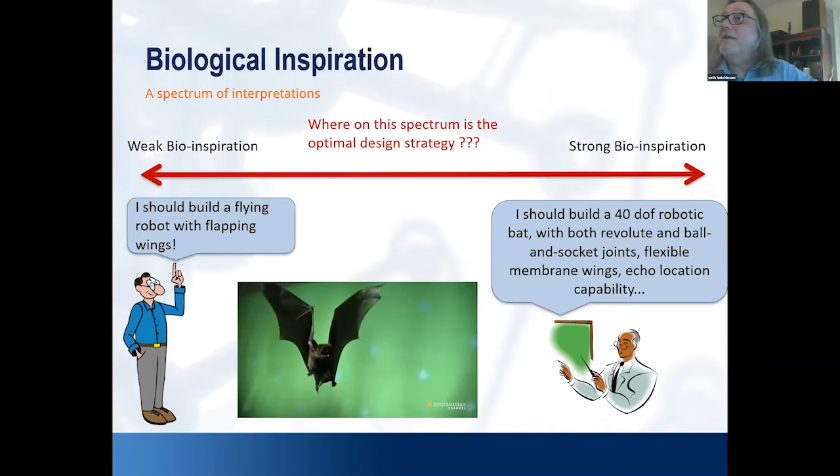So you can place yourself anywhere on this spectrum, from very strong to very weak bioinspiration. And the question that comes up, I think that's interesting, is where should you be on this spectrum? Right? At what point should you move away from looking at the animal and start thinking about engineering? Or should you ever do that, right? Should you focus on the animal and its capabilities and its biological and mechanical structure all the way to the end? So this is how we looked at the problem for this biologically inspired robot bat.

It was first to step back and ask, what are the right questions, right? What should we even be asking about when we look at the biological creature? And here are the first couple of questions, right? Should we try and really build a robot that is a replica of the biological animal? Or should we abstract away a lot of the details of the bat very quickly to a simpler kind of mechanical structure? And this raises immediately the question, well, then what are the salient features of bat-like flight, right? If you want to capture this kind of behavior, what are the right features to look at?

A question that I thought would be really important, and it is important, but not nearly as important as I expected it to be, is what's the role of geometry versus dynamics? And the question that I thought would be really interesting is, can you do flapping flight based purely on the geometrical structure of the robot and the wings and the trajectory? Can we ignore dynamics? If I study bats as they fly, and if I really understand the geometry of what's happening in the bat wings and the bat body and the trajectory of the body, is that enough? Or do I need to worry about the Lagrangian dynamics, right?

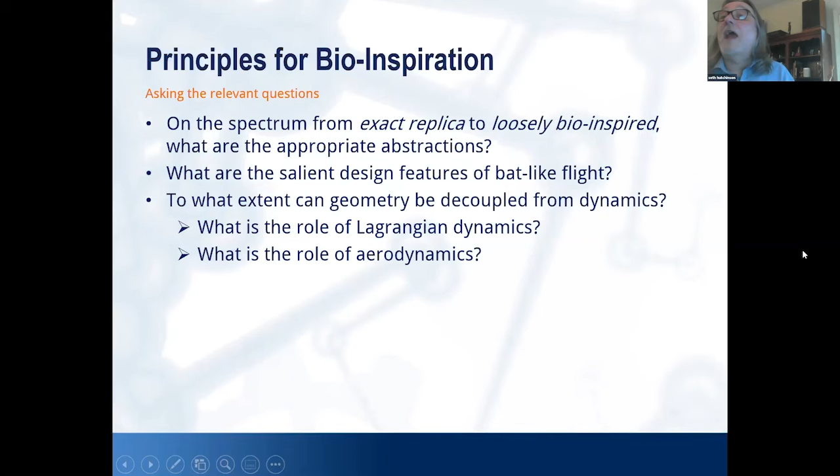When you flap the wings, you exert forces on all the joints that interact with one another. Do I really need to worry about aerodynamics if I have this full understanding of geometry? And it turned out that the answer is, yeah, you really have to worry about all the dynamics in the end. Nevertheless, you can get pretty far just by studying geometry, right? And in the talk today, I'll show you how far you can get and why you have to change from a geometrical perspective to a dynamical perspective at some point.

And then finally, questions about control, right? Once you have a physical object that you've designed and built, once you have the mathematical models for how that object behaves when it interacts with the environment, how do you control it?

And there are a few things that are obvious just at a first passing thought, right? You don't have to think very deeply to realize that you will not be able to do real-time control with exact inverse dynamics, right? You won't be able to solve the inverse aerodynamic problem in real time. So can you cheat basically? Can you do the kind of cheating that control theorists do? For example, can you do linearizations that will get you closer to the kind of control that you need to get the behavior that you want?

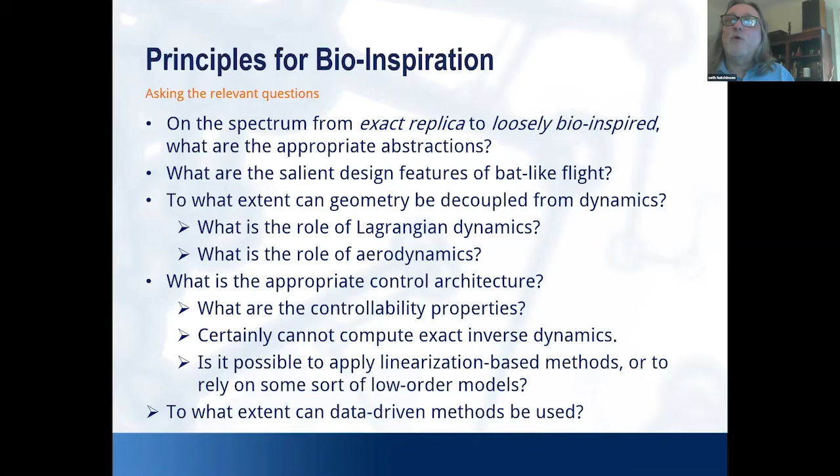And then finally, what about data? Data has been, in the last 5 years, finding its way into robotics quite a lot. In fact, if you look at the topics that are discussed at ICRA last week, it's not the #1 topic, but I think it's number 2, 3, and 4. The topics that are related to machine learning in their different manifestations. And so how can we do learning on the physical system, the biological system rather, to inform the robotic design and the robotic control? And this is the way I'm going to approach those questions in this talk.

So I'm going to begin just by looking at the bat, and by the bat, I mean the physical animal as it flies. What can we learn? What can we infer from looking at the physical animal? From that, I will posit some constraints on the design, and in particular, some constraints on the topological structure of the design. Once we settle on a topological structure, then there are questions about what should be the design parameters, right? What should be the values of the various kinematic parameters that go with the topological structure? Then once you have that, how do you optimize trajectories, taking into account aerodynamics, and then the control design?

Some extra stuff, if we have time, to talk about how we did a little bit of extra machine learning stuff on the back end to improve all that. But we'll see if we have time for that.

I seem to be rambling more than usual, so we may run out of time early today.

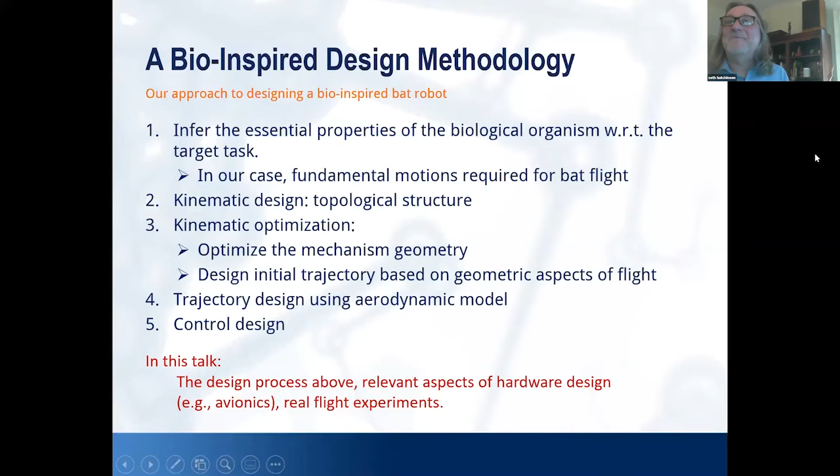We'll see. All right, so let's look first at biology. Here is a cartoon of the bat's skeleton superimposed on a photograph of a bat. This is taken from the work of Sharon Swartz and Kenny Breuer. We did a lot of collaboration with them in this project. They study the bat as an animal from the perspective of biologists, but also from the perspective of engineers. And they have done some really beautiful analysis, some of which I'm going to talk about in the next few slides, to really understand what's happening when the bat flaps its wing and flies.

But if we look just for a moment at the physical structure of this animal, it's complicated. This is much more complicated. I think it's fair to say that there is no robot at the moment that has a kinematic complexity equal to or larger than what a biological bat has. There are basically about 40 degrees of freedom. Some of them are passive that respond when other degrees of freedom move. Some of them are active. Some of them are ball and socket joints. Some of them are revolute joints.

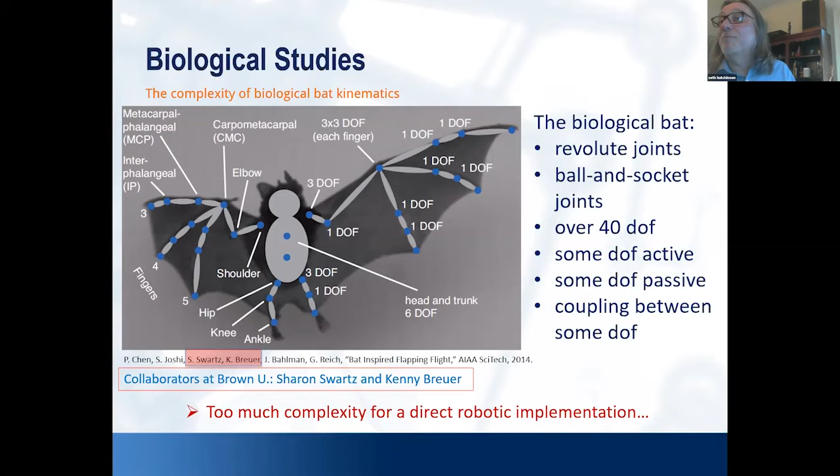You can see various kinematic trees that are coming out of the torso. In addition to that, there's the added complexity that nothing is rigid in the bat. All of the bones are flexible. Of course, the membrane that goes over these bones is flexible as well. There's far too much complexity here to attempt to build a robot that has the same kinematic structure. There's no way we're going to build a robot that has 40 degrees of freedom and also is comparable in size to a biological bat. Right? So we're going to have to make some simplifications.

What are the right simplifications to be made? When you start thinking about how can I simplify the structure of this biological bat, how can I extract high-level geometric descriptions? The first thing useful that you might recognize is that what you see here in terms of the skeletal structure of the bat is almost exactly the same as the skeletal structure of a human from the shoulder to the fingertips. Less fingers, but you'll see a shoulder, an elbow, and then 3 very long fingers, basically with the same topological structure as the human hand.

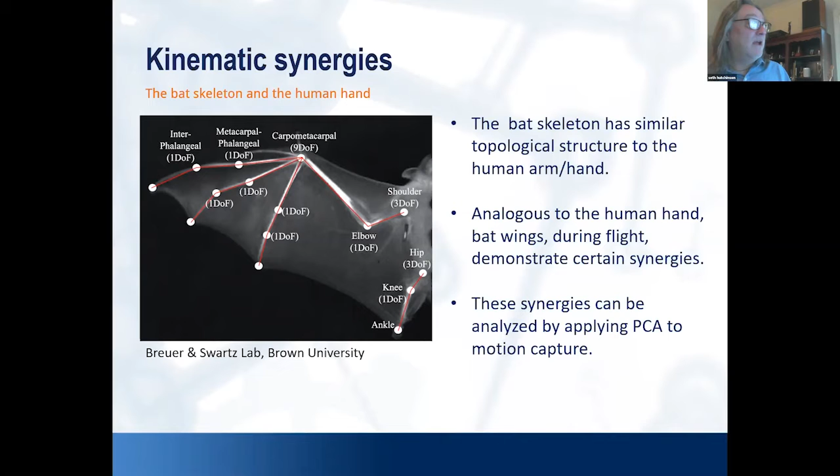And why is that interesting? It's interesting because roboticists have been studying grasping in the human hand for a long time. And so we have a lot of tools in the robotics world for analyzing robot grasping, for example. We know a number of ways to approach that problem, and we can apply those directly to what's happening with the bat. And in particular, we can investigate these ideas of synergies.

How do we do that? Well, step 1 is collect a bunch of data about the biological animal as it flies around. And so here you see a bat flapping. This is actual video from Kenny and Sharon's group. This is taken from below, by the way, I don't know if you can tell. There are 2 markers on the belly and the chest of the bat, and then a bunch of markers on the wing.

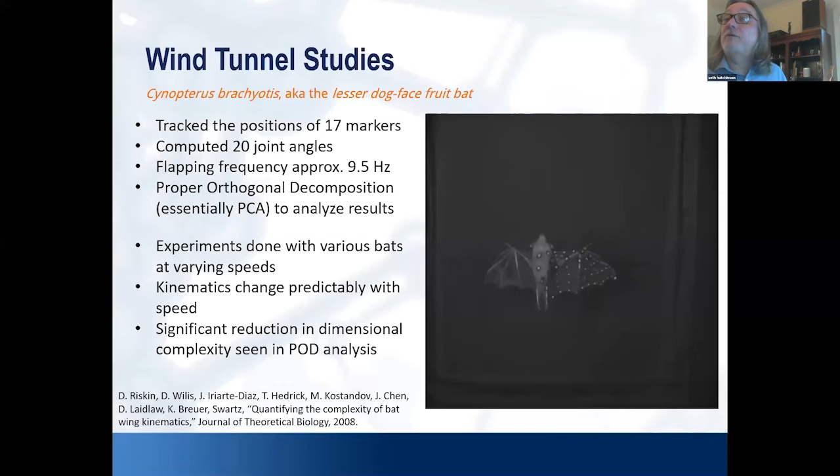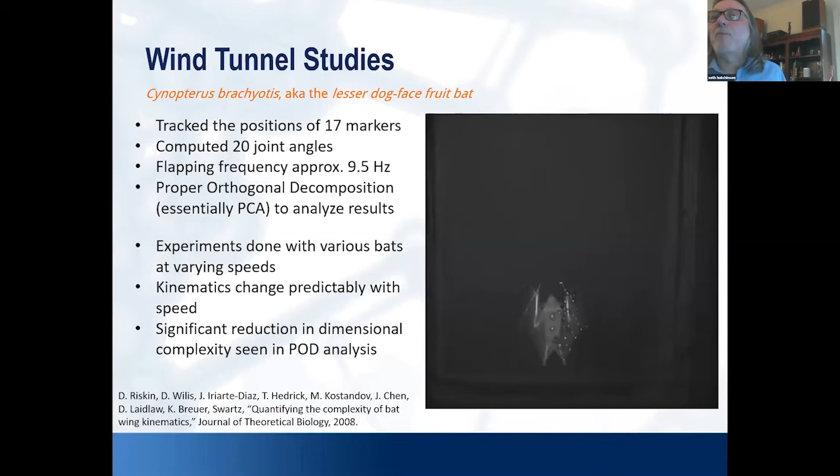And you put this into a wind tunnel with a motion capture system, and you collect data of the bat flying in the wind tunnel. And in this case, I think they used 17 markers, computed some inverse kinematics to get joint angles for the joints in the skeletal structure. The flapping frequency was about 10 hertz, 9.5 hertz, it says here. And then they did a principal component analysis. They call it proper orthogonal decomposition, but to us, it's more familiar as principal components analysis, to figure out what's happening with this bat as it flies.

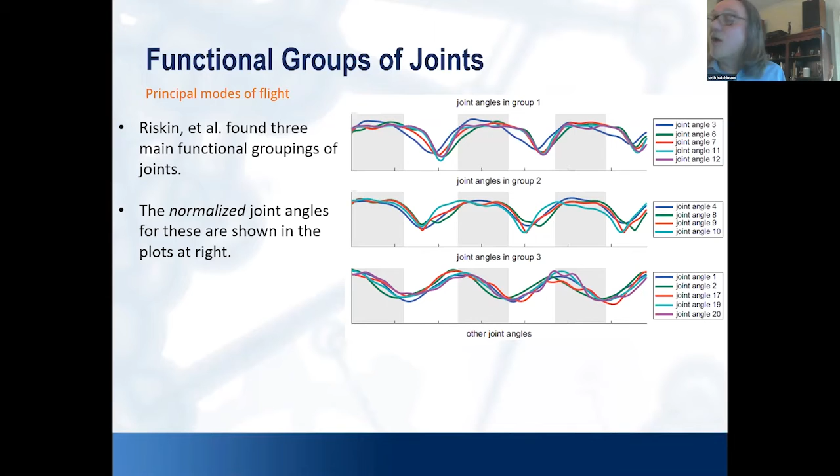And this is the data that comes out. This is not exactly true. When you look at these 3 plots, everything looks so perfect. In fact, to get these plots to look so perfect, you have to do some normalization, you have to do some phase shifting and so forth to get things to line up visually. But what comes out very quickly from the PCA is that there are really only 3 kinds of interesting things that are happening when this bat flies.

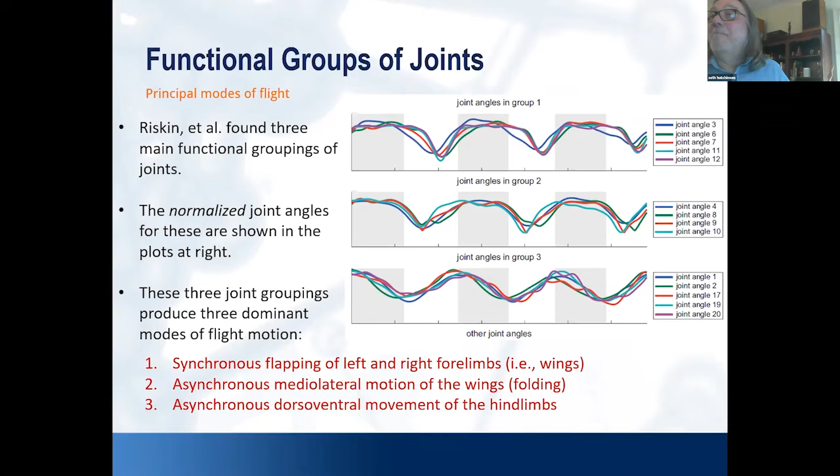There's synchronous flapping of the left and right wings. There's some asynchronous mediolateral motion, which basically means the wings fold in and out. I don't know if you can see my arm well, but you get this folding motion of the wings. And then finally, the hind limbs move independently. So this is it. Everything that's interesting about the wing structure of the bat can be grouped into one of these 3 kinds of motion. And if you start there, you're now in a position to think about what should be the topology of the kinematic structure of a robot if the robot is meant to replicate these 3 kinds of motion.

And so the challenge is this: replicate those 3 kinds of motion, synchronous flapping, wing folding, dorsoventral leg movement, but with a lot of constraints. And the constraints are hard for engineers. Low weight, low power consumption, small size, structural stability. And basically the hardest things about this design come from the fact that when you throw it into the air, it should fly by flapping its wings.

If it's going to fly by flapping its wings, if you know much about aerodynamics and Reynolds numbers, it means it can't be very large. If you don't want it to fall out of the sky, it can't be very heavy. It has to be low power because it has to carry its own power source with it. And if you have to put a giant battery on it, then there's no way for it to fly. And then finally, all these things fight against the structural stability. When you flap the wings, you don't want them to break. You want them to withstand whatever aerodynamic forces are applied when the flapping occurs.

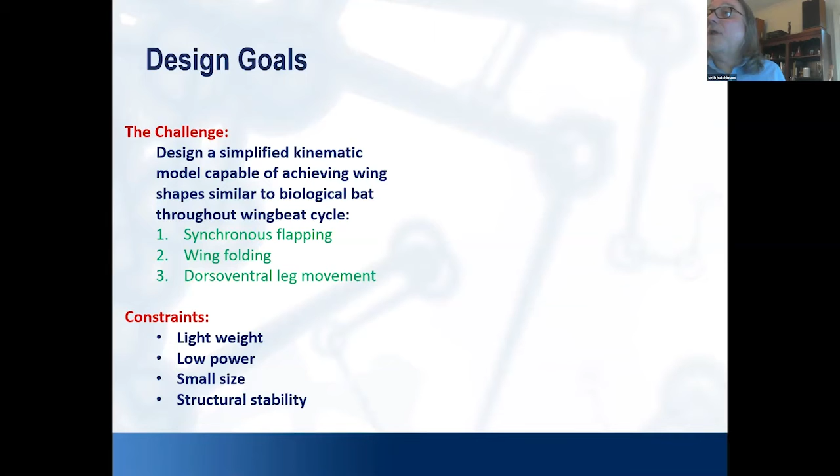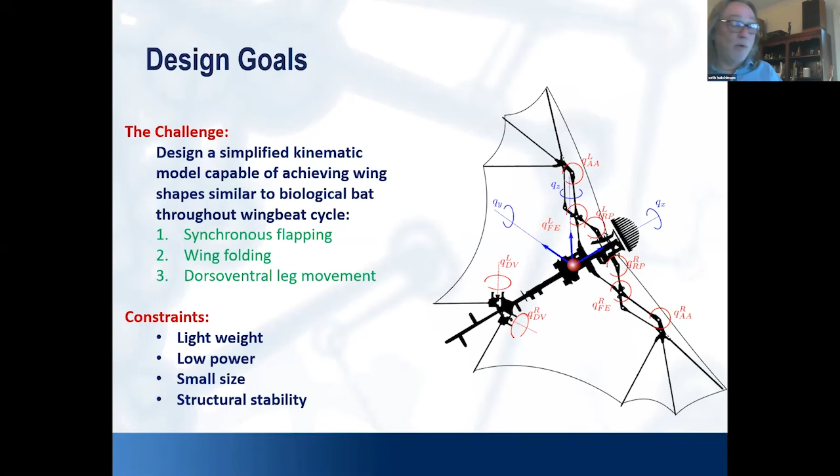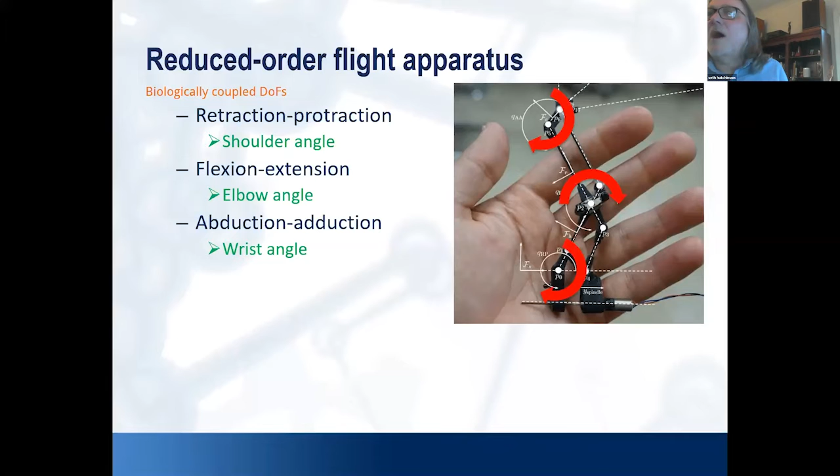This is what the structure looks like that we arrived at. This is an a posteriori look back at the design that came out after some trial and error. The mechanical version of that is here. This is a Watt mechanism that you see. Basically, these 3 degrees of freedom are coupled so that when this linear actuator moves back and forth, these 3 revolute joints move in response as shown. And this gives us a way to fold the wing and the fingers in and out, coupled together. So this captures the tight coupling that you saw a few slides ago.

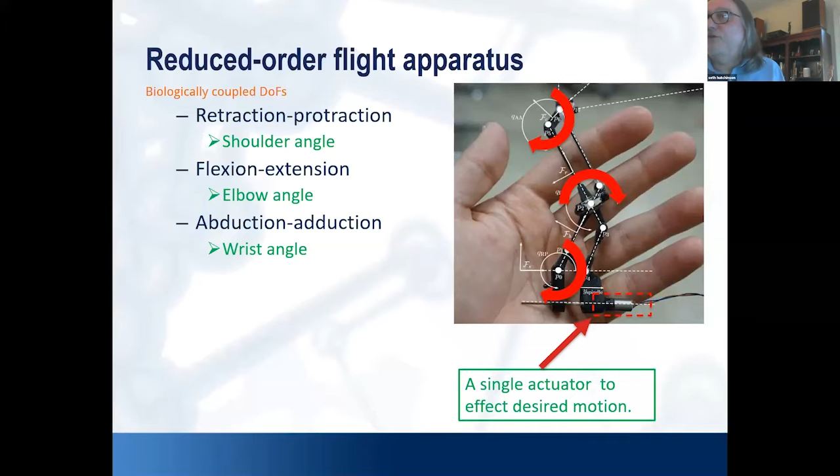Really there's only 1 degree of freedom happening when this robot folds in and out. Can we build that into the mechanical structure? The answer is yes, and here's a mechanism that does that. This 6-bar linkage that you see is called a Watt mechanism. It's a parallel mechanism, and the reason it's nice is that being a parallel mechanism gives it structural stability to support forces perpendicular to the wing.

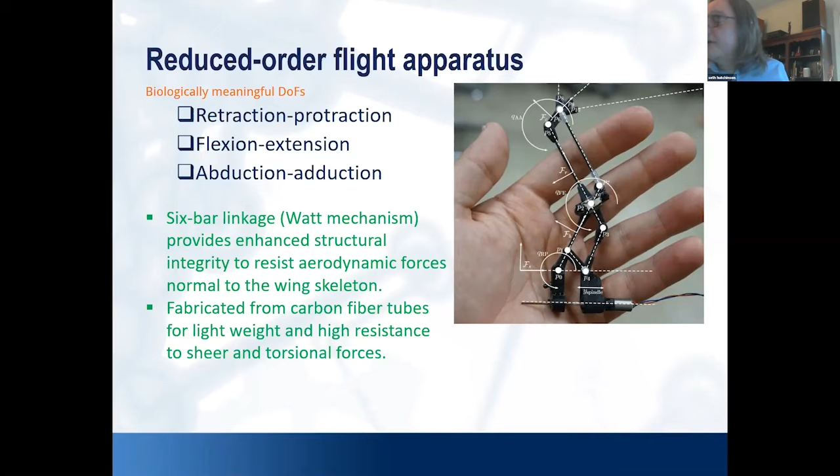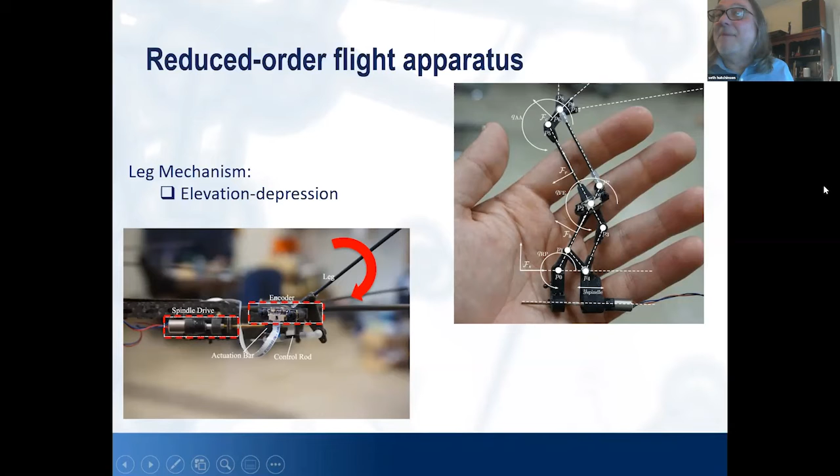So when the air pushes up, this parallel mechanism is able to resist that, and it doesn't bend or break. It's all done with carbon fiber tubes to get extra structural strength. And then there's an encoder-equipped spindle drive at the back that moves the tail, the legs independently up and down.

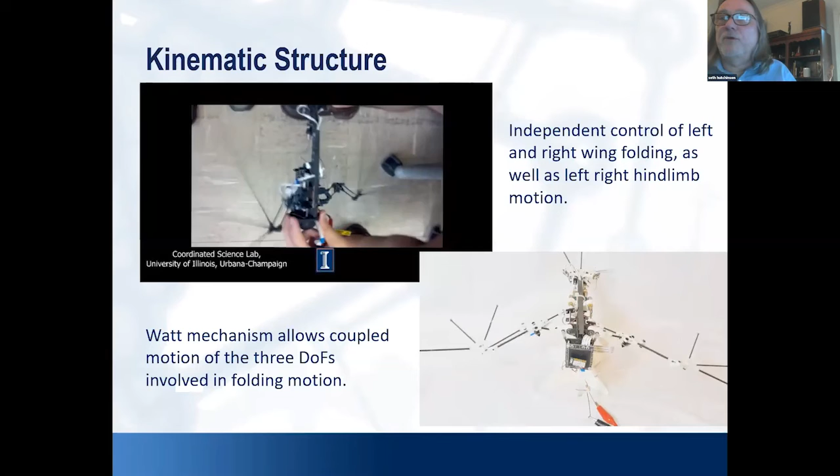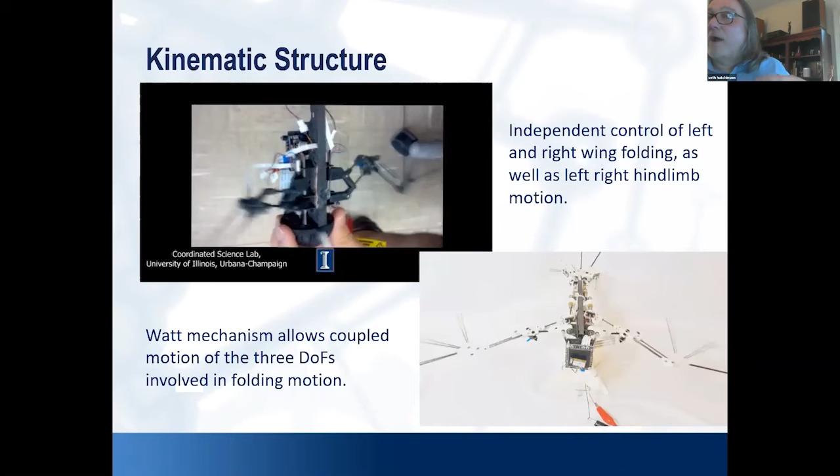Right, so here's the way it looks. On the top left, you just see the robot moving. It's unactuated here just to see what the degrees of freedom are. And in the bottom right, you can see what are the actuated degrees of freedom and how can we control them. Right? So you see, as the thing on the left or on the right, as those wings move, it's one actuator, one linear actuator that's moving. And as it moves, the entire shape of the wing changes in response.

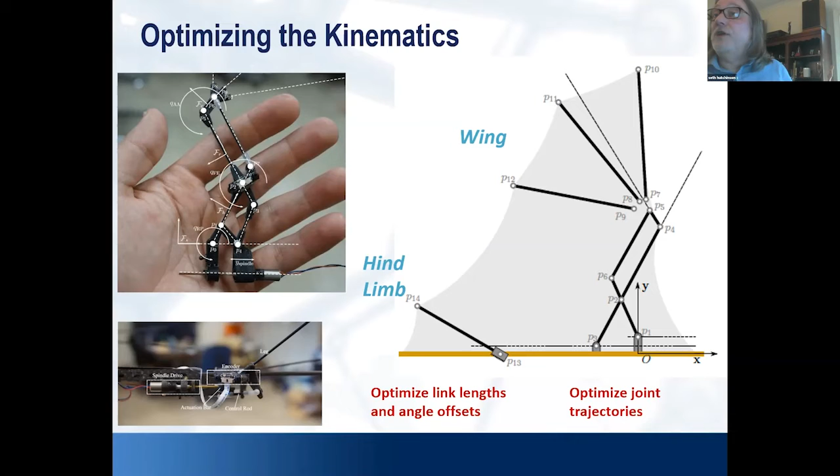All right, so now that you've got the topology, how do you design the kinematic structure, right? What should be the size of each of those links, and what should be the offset angles? And then once you have the physical structure designed, what should be the trajectories of the actuated degrees of freedom in order to achieve flapping flight? So here's just a very quick, and it's not important at all to remember any of this stuff. Just remember the groupings. You have 3 actuated degrees of freedom. You can flap the wings, you can fold the wings, and you can move the tail.

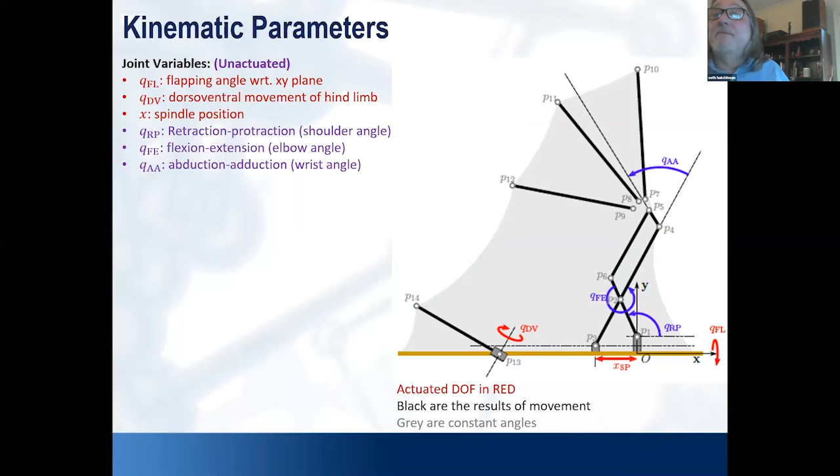You have 3 passive degrees of freedom that respond, right, that are coupled with the actuated degrees of freedom, and you saw those a couple of slides ago. And then you have a pile of kinematic parameters that you have to design. And if you're a manipulator person, you can think of these as being just sort of fancy versions of Denavit-Hartenberg parameters. Right? There's really not anything more happening here than that.

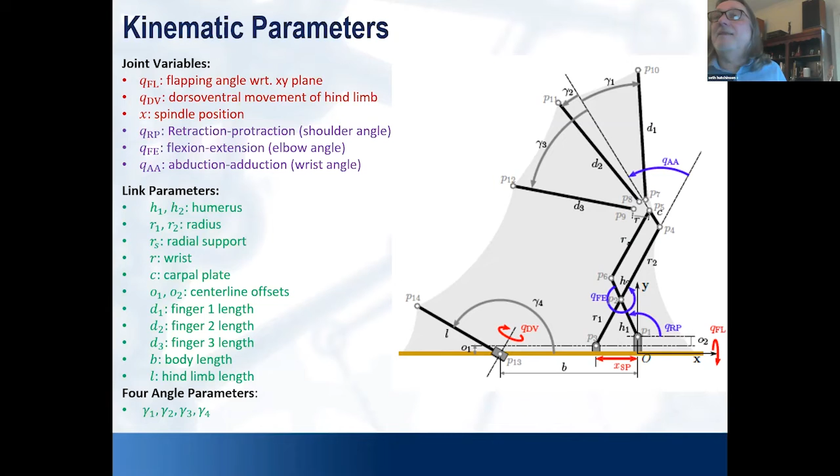And so the questions are, what should these link parameters be? Right? What should be the angles between the fingers? Right? And these are constants, part of the mechanism once you design. So how do you decide that? And the answer is this. We're going to decide what those parameters should be so that the geometry of the bat wing is the same, I'm going to say the same in quotation marks, to the geometry of the biological bat during the flapping flight.

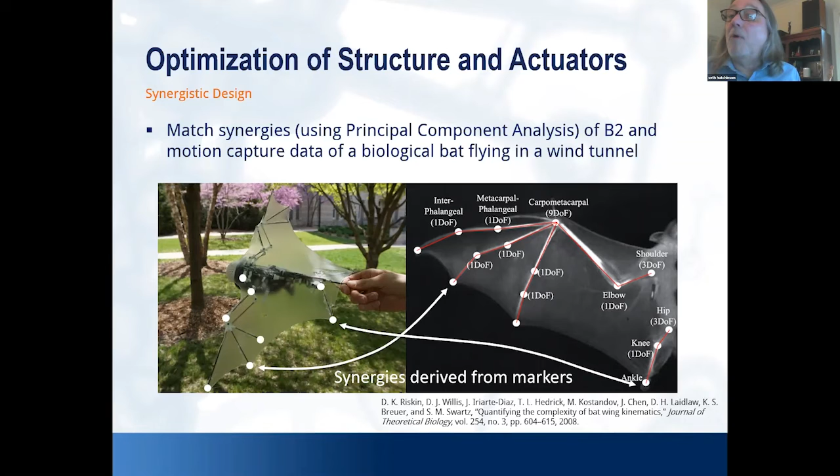Now, obviously, it's not going to be the same in a point-to-point exact transformation way. We want to capture the sameness in some abstract way that captures the salient aspects of the geometry. So we have to learn what the salient aspects are. And how are we going to do that? Well, we have markers on the bat. You saw those a couple of slides ago. For every possible design that you can imagine, you can immediately write down where would be the markers on the robot that correspond to these markers on the bat.

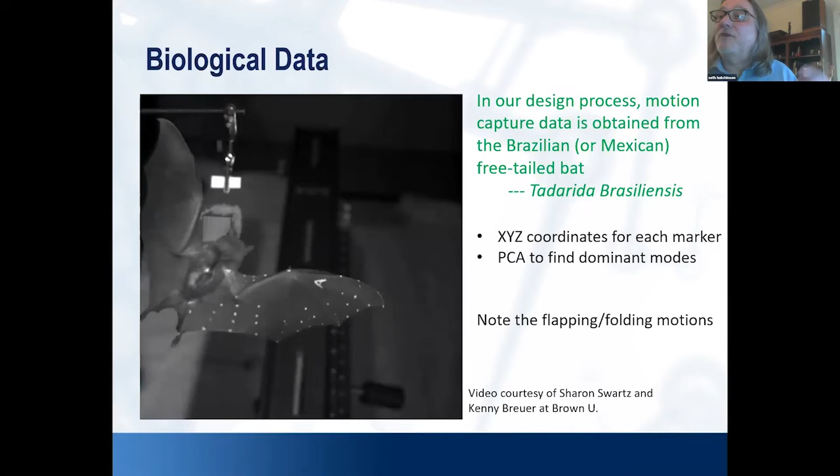And so now you can look at motion capture studies of the bat. And this one's here just because I think it's really beautiful. You can see what's the trajectory of each XYZ point on the biological bat, do some sort of principal components analysis on that to reconstruct the shape of the wing as it evolves over time, and then try to design the mechanical system to replicate that as best as you can.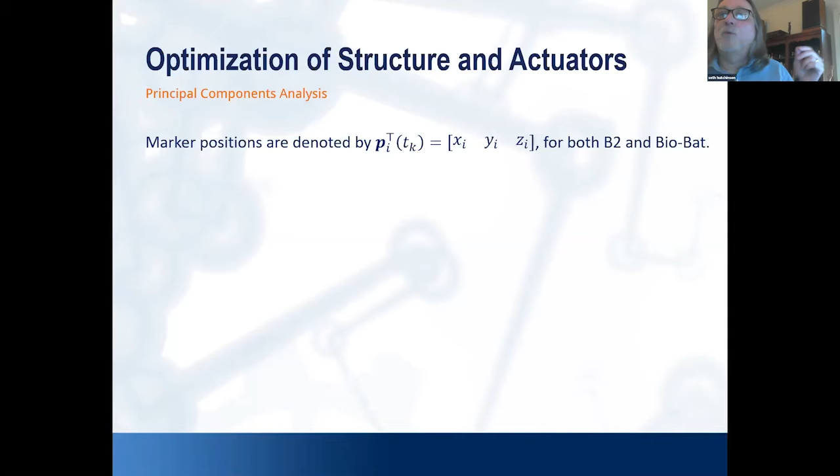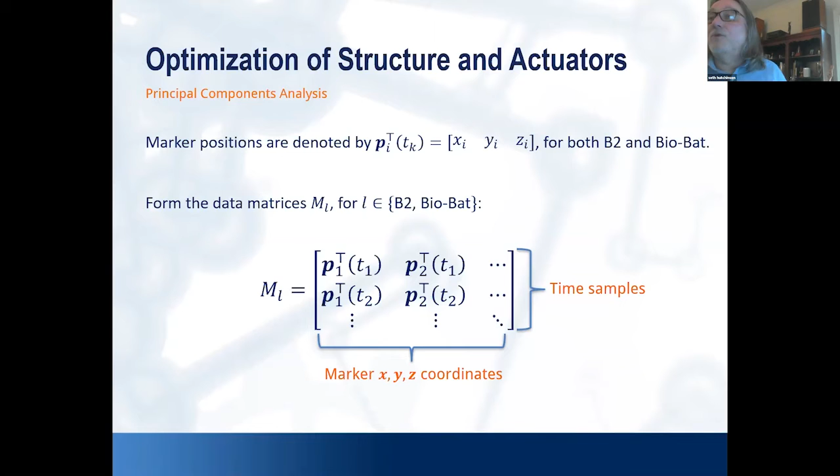And the way that we did that was to place markers on the robot. These are not real markers because this is during the design stage, right? So it's where the markers would be if the robot were designed in a certain way. Collect up for a particular trajectory the positions of the markers as a function of time, right? So each row corresponds to a time sample, and each column corresponds to the position of a particular marker. And then we do that for both the biological bat, where we just capture that data and store it, and then for the simulated design that we're looking at any particular moment.

That matrix, it's a big matrix, and it doesn't have nearly as much information in it as it has entries. So what can we do? We can do a singular value decomposition of that matrix, truncate the singular values. I think we used 3 in the end. Set the rest to be equal to 0, and then reconstruct the parameters of the motion and of the geometry in terms of that truncated singular value matrix.

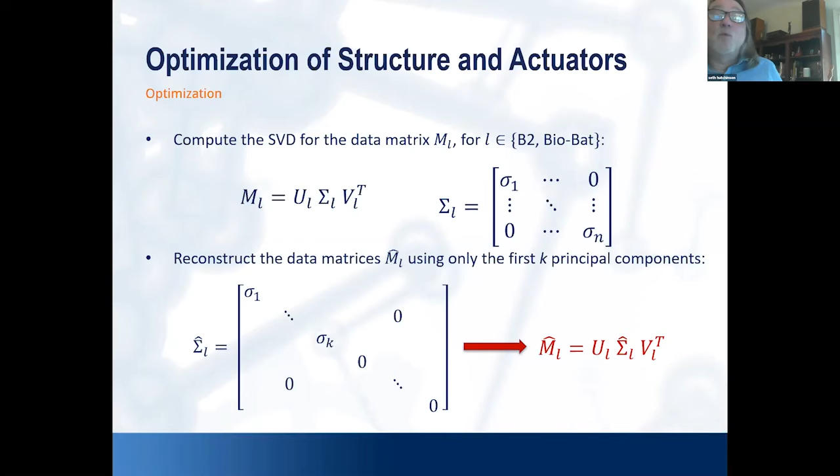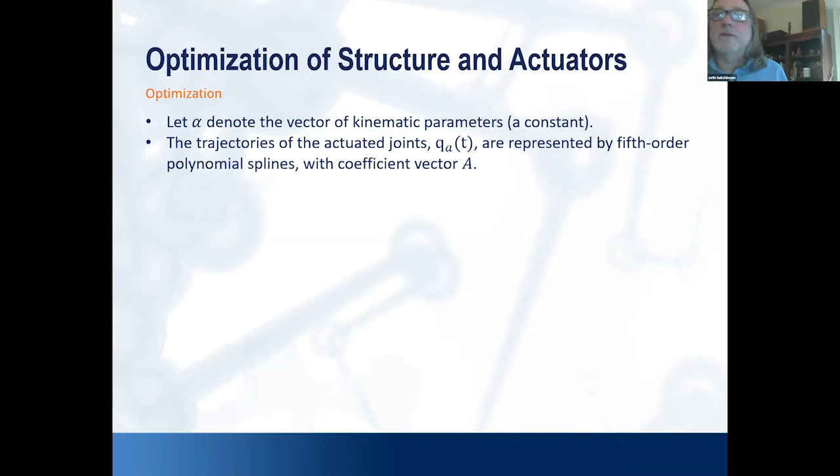And then the question is, what should be the design parameters for the robot such that the truncated matrix for the robot matches very well the truncated matrix for the biological organism, for the actual bat. How do you do that? First, there's a bunch of parameterization, a bunch of design constants for the mechanical structure, a few time varying parameters for the trajectories that we just modeled as low order polynomials, 5th order it says here.

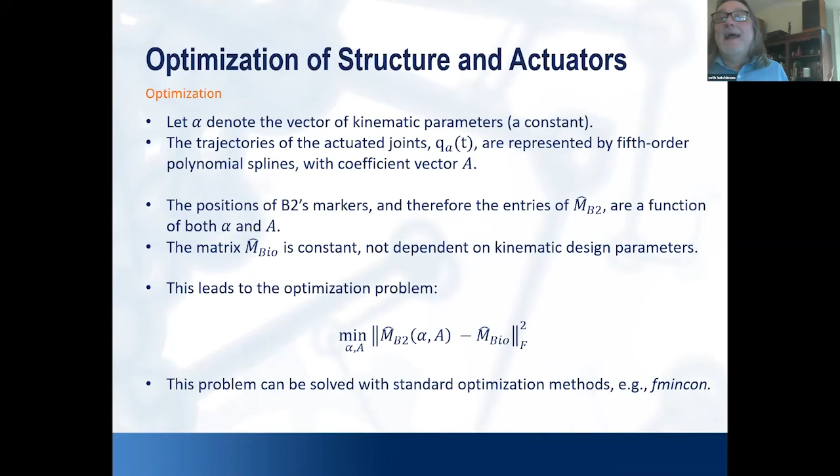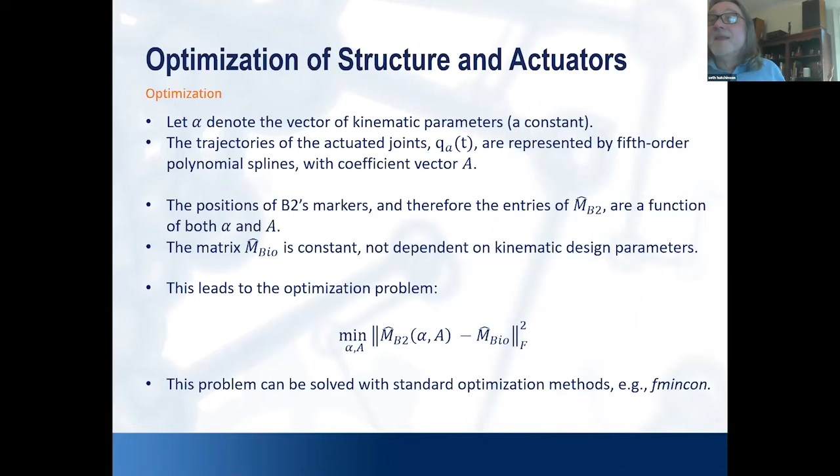Now if you know the trajectories, you can reconstruct the trajectories of each marker, both for the bat and for the robot. And it's just an optimization problem, right? So minimize the Frobenius norm between the 2 truncated data matrices over the trajectory, where the optimization variables are the constants of the mechanism and the coefficients of the polynomials for the trajectory.

And if you do that, this is the kind of result that you can get. On the right-hand side is a reconstruction of the flapping flight of the biological animal, right? So this is reconstructed by triangulating the data that we got back from motion capture from Kenny and Sharon. And on the left is the B2 structure. You can see the wing, the Watt mechanism, the parallel mechanism folding in and out as the flapping occurs.

And so this is the moment when I thought a few years ago, if you build a robot and throw it into the air, it should fly because geometry should be enough. And at this moment, I will tell you, I was just really, really wrong. If you throw the robot into the air, it crashes almost immediately and quite spectacularly. And you realize that that hypothesis just doesn't work.

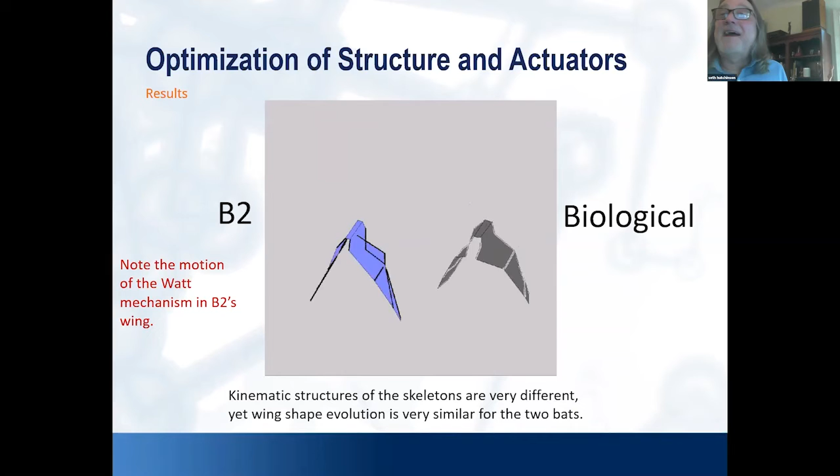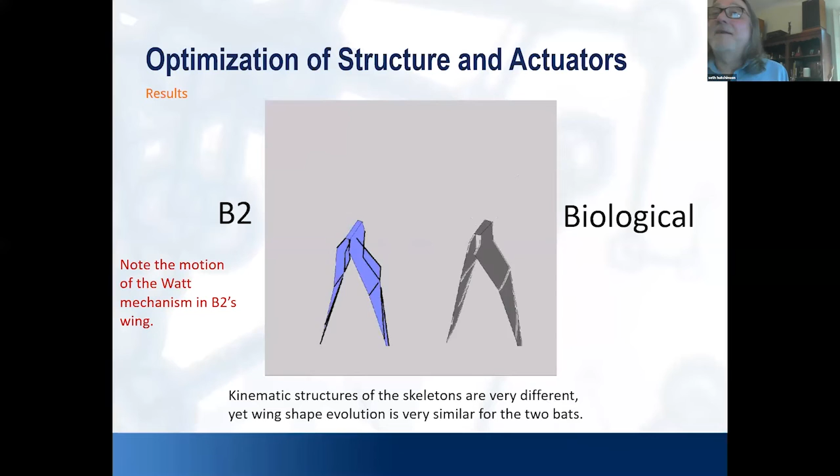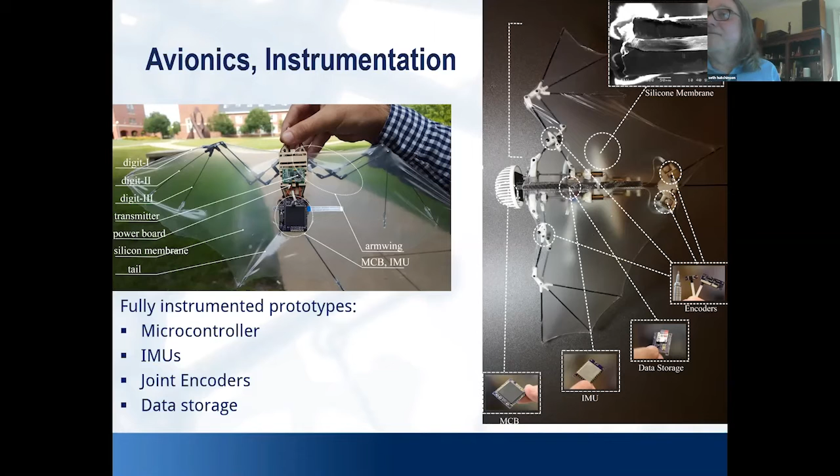Just to give you a sense of the difficulty of the design, there's a lot of stuff in this robot that has nothing to do with the mechanical flapping, right? There's an IMU, there's data storage, there's a microcontroller, a lot of avionics equipment that goes in addition to tiny motors and encoders and all of that stuff. You've seen some version of this a minute ago.

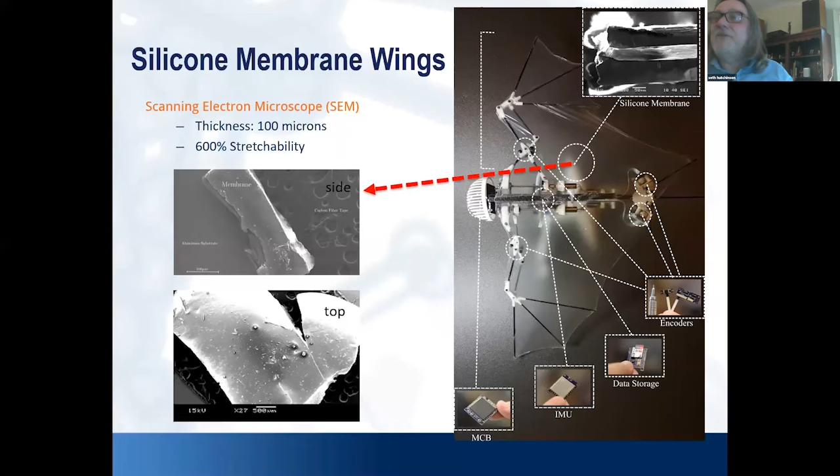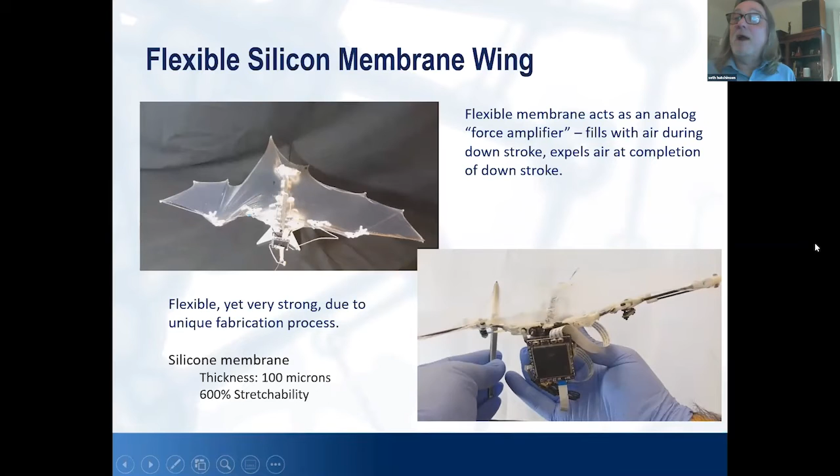And what you get when you do this is something that is similar, at least to a first order, to what happens in biological bats. Namely that when the bat flaps its wings, the membrane of the wing deforms, it fills up with air. And then at the bottom of the downstroke, the membrane pushes that air out. And you get this force amplifier in the aerodynamic world that comes just from these passive dynamics of the membrane structure. And so it's a very cool property that we were able to exploit, I think, as well in the robot design.

So now I'm going to talk really quickly about trajectory design. And the thing that I think is most important about the next bunch of slides, many of which I'm going to skip over very fast because the details are not that important, is this. In the end, you have to figure out something about aerodynamics and the Lagrangian dynamics of this system if you want the trajectory of the robot to behave well.

And basically, there's a line that you draw, right, on the spectrum from data-driven approaches to engineering with sophisticated mathematical models approaches. And where do you draw that line is an interesting question. And the answer for us is you draw that line right here, right after you've done the geometry and designed the mechanism. The question immediately should come up, well, why? Why do you draw the line there?

And the answer is really simple, because at this moment, we have used everything that we can measure. So we don't have the capability to measure what's happening in terms of the structure of the biological bat as it flies, how much force is being exerted on the shoulder or on the elbow or on the membrane. We're not able to measure any of those things, right?

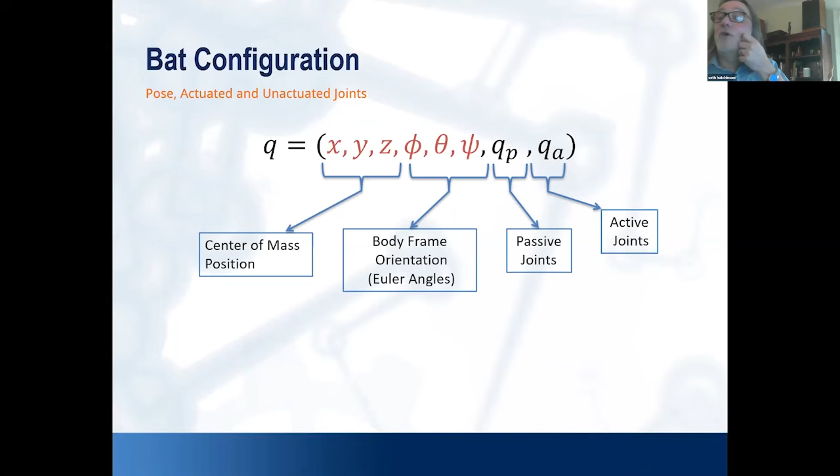And the mathematical model is the usual one. You have a system that's just defined in the configuration space in the usual way. You can think of the torso of the bat as a rigid object. So the usual rigid body dynamics are there, X, Y, Z, and 3 angles. There are some passive joints, and then there are a few active joints. And in our case, just a few, right? The 3 that I showed you, but for both sides of the robot. So half a dozen actuated degrees of freedom.

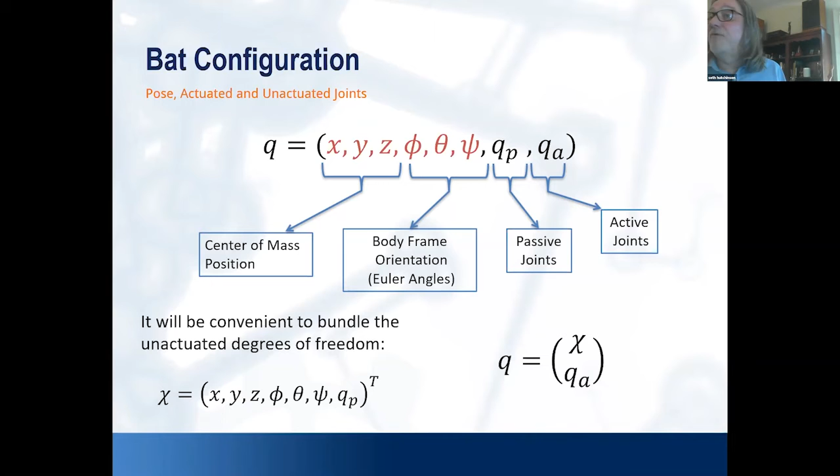And in the end, you can bundle those up nicely into a configuration that has a bunch of configuration variables over which you have no control at all, and a few configuration variables over which you have complete control, right? So you have complete control over the actuated degrees of freedom. They respond to the electricity that you send to the motors.

The nonlinear model of the dynamics is pretty similar to what you see when you look at robots. Let's see if I can do this. Yeah, so you have this stuff, which is your usual Lagrangian dynamics of the robot, right? M, C(q, q̇), G(q): that's acceleration terms and inertia matrix, Coriolis terms and gravity terms. And then you have this, which is the torques that you put in to the motors, right? So all this stuff is in any textbook on robotics.

But you have now also this stuff, these forces that come from aerodynamics. And the problem with the forces that come from aerodynamics is that they depend on the accelerations and the velocities of the configuration parameters. So you cannot decouple the aerodynamic forces from the input forces and torques, or from the configuration parameters in a nice way. Right? So the torques going to the motors, you can decouple that stuff from what's happening in terms of accelerations and velocities. I'll put in more electricity and I get more torque, and that's that. But for the aerodynamic parameters, the aerodynamic performance depends on what the wing is doing in a way that doesn't give you that clean decoupling.

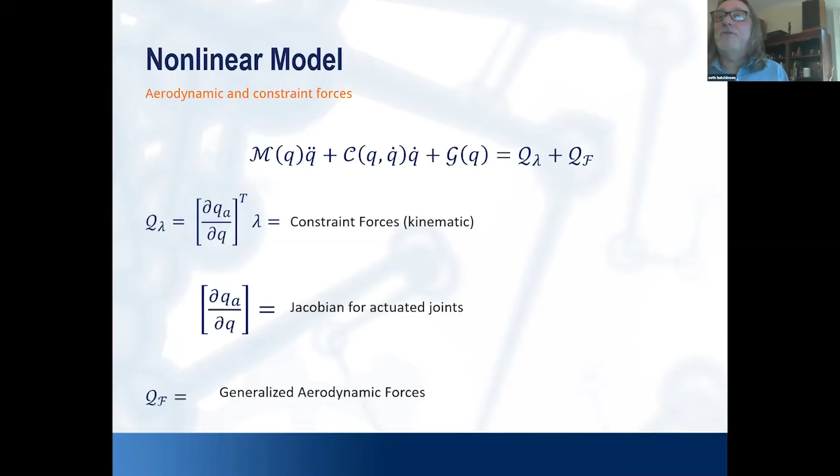So I'm going to skip this, but it's just to say that you can rip those equations apart. You can use a very simple model of aerodynamics. And this may not look very simple, but it is. I'm modeling each wing as a big flat rectangle so that I can easily integrate the forces over the surface in a way that is computationally super tractable, but not particularly accurate in terms of what's really happening.

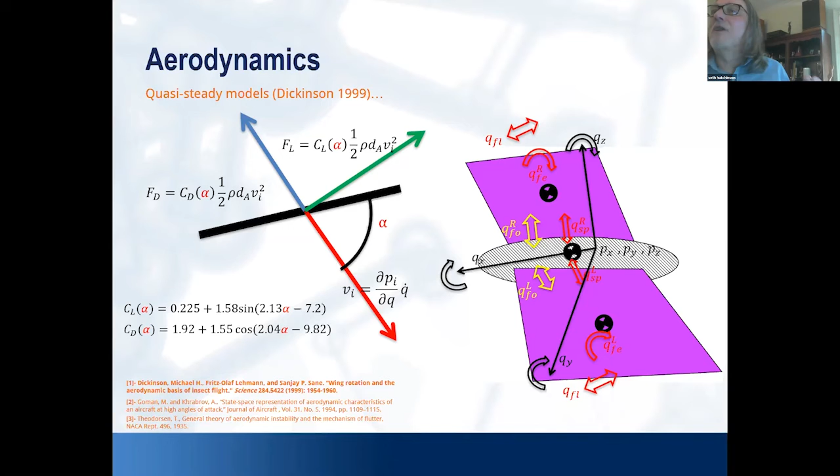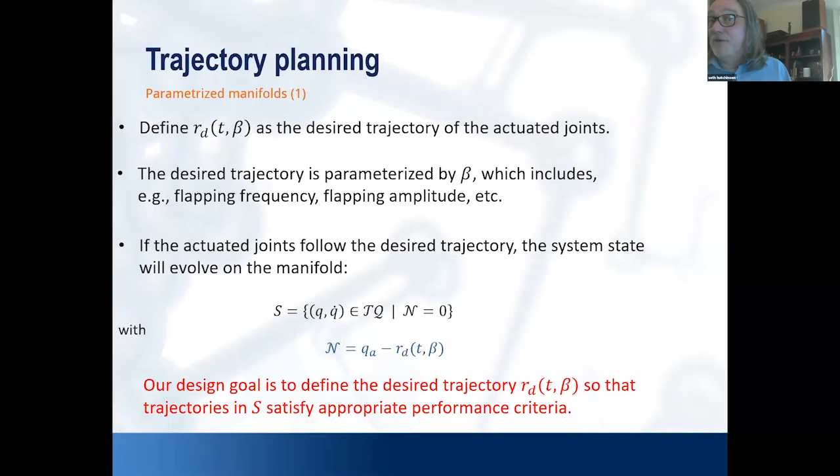And then I'm going to do trajectory planning, which is put in the variables for the actuated degrees of freedom and see what happens. I'm going to skip this stuff. It's just some nuances about how to deal with constraints to keep this robot flying on the right manifold. This is the part that's interesting, I think, once you get past the sort of mathematical modeling stuff: how do you do the trajectory optimization?

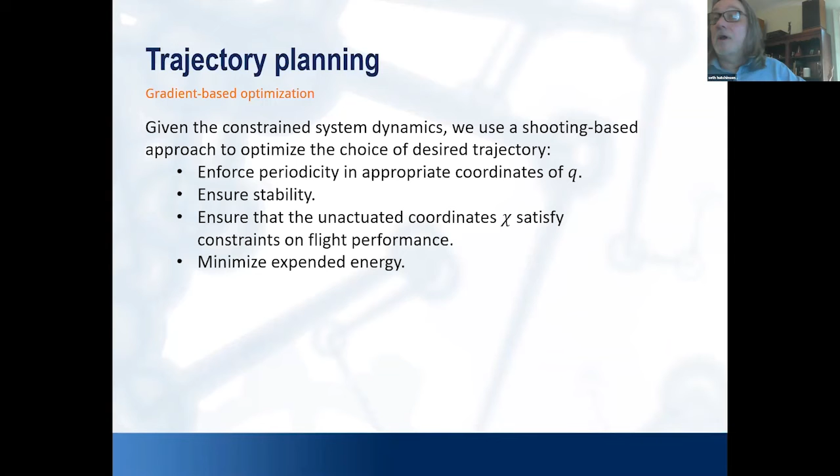And the way we did it was just numerical methods, right? So we have the models that I just breezed over, but you can write them down, you can solve them numerically. And now you enforce some constraints, right? You want stability, periodicity of the motion. You want to make sure that the unactuated coordinates don't correspond to trajectories that fall out of the sky. You'd like to minimize the energy that's being used. And you can do all this stuff in a straightforward way.

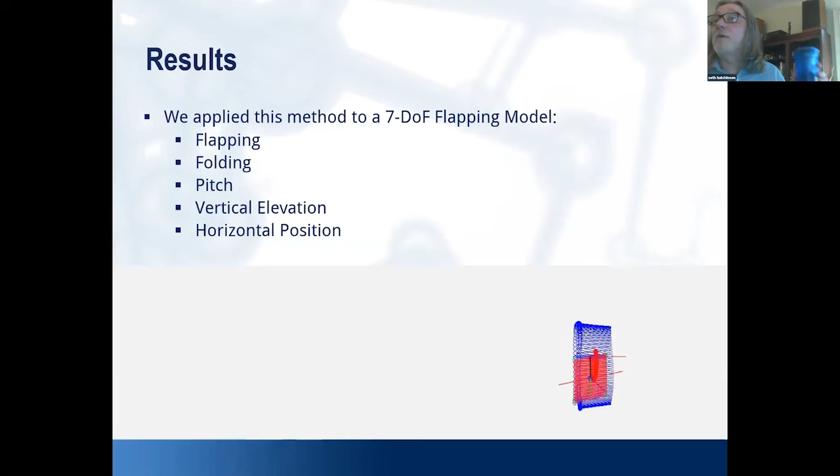We did this basically with shooting-based methods. And here's the kind of trajectory that comes out of the optimization process, right? So what you're seeing here is simulation.

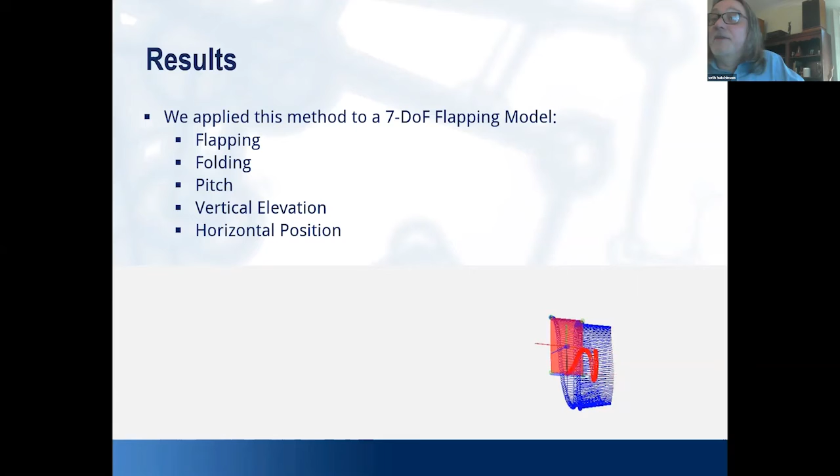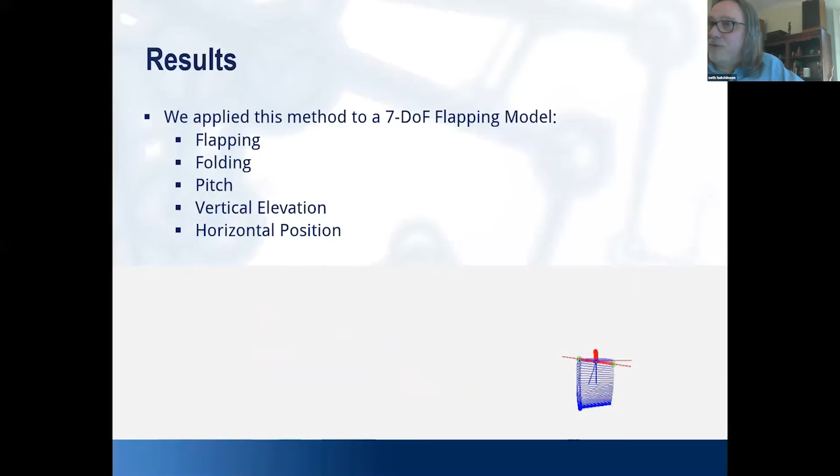And so now the question is, if I can simulate this, right? If I can optimize the trajectory, and this is what the simulated system looks like. Well, the simulated system is pretty simple. Right? It has just like 7 degrees of freedom to it. So when I try to make my real robot follow this trajectory, what do I have to do? And the answer is you have to design a controller to track that.

And the way we do control design, I think I'm not going to succeed to teach you about the method of Poincaré in 5 minutes. And if you already know the method of Poincaré, then that would be 5 minutes that are wasted. So let me just tell you this. You can think about dynamics as being continuous, right? A system evolves continuously over time, and you can write those equations down. I showed you the dynamic equations of the system 15 slides ago.

Another way to think about the dynamics is to think, let me just look at the system at discrete moments of time. And in legged locomotion, this is a very popular thing to do. The discrete moment of time when you look at a running robot might be the moment when the foot hits the ground, right? So I'm only going to look at the robot when the foot hits the ground, and the next time I look at the dynamics, it'll be the next time a foot hits the ground. And we can do the same kind of thing with flapping flight, where we look at the system dynamics at the bottom of the downstroke, for example. Or you can pick any moment that you like. We picked the bottom of the downstroke.

And so when I do this controller, I'm going to look at, here's where I am right now at the bottom of the downstroke. What do I need to do to the control input so that after the wings go up and come back down again, my system will be better than it is now in terms of its dynamics? Or I want to improve some kind of characteristic, get closer to a desired trajectory, for example, right? So that's how I'm going to think of control design.

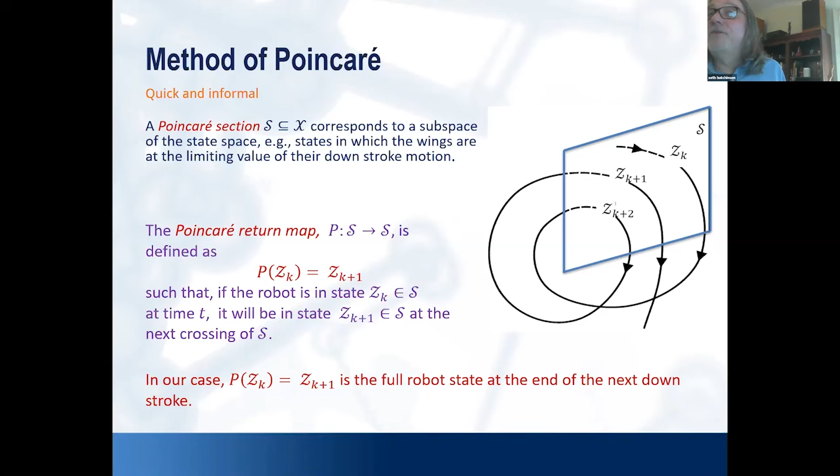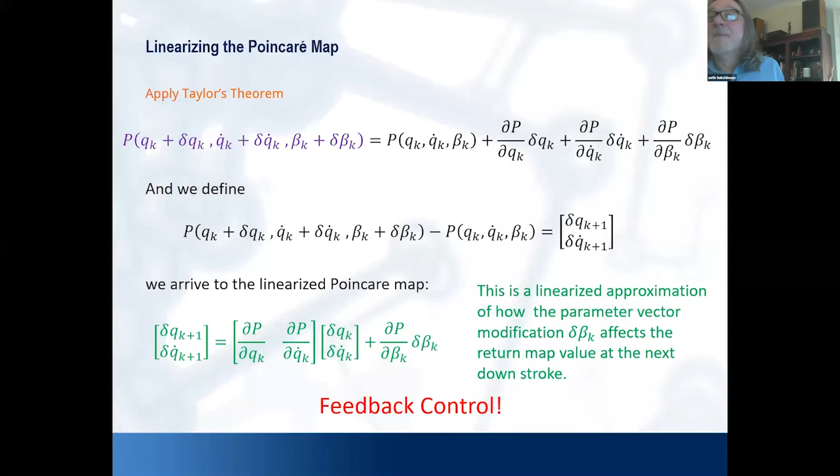And the way to do that, let's skip this, is just to say, I can take that mapping from this moment in time that maps me to where I will be the next time I hit the downstroke. That's called the Poincaré map. I can linearize the Poincaré map, right? There's some mathematics involved in that, but in the end, it's just a linearization of this complicated map. The system dynamics that are linearized are shown in green, but really they look just like any other x dot equals Ax plus Bu, where the control input u is here delta beta_k. And so I can do feedback controller design. And in fact, that's what we did. We did an LQR design where we linearized about the desired trajectory.

And so it's disappointing, I think, in some ways. Let's see, where did it go? Pointer options. This matrix K, in an ideal world where computers are super fast, you would dynamically compute this gain matrix by solving the LQR problem in real time. But in our world, all those equations are much too difficult to solve in real time on the processor that lives inside the robot. So we did a static control design around the linearized version of the trajectory, basically.

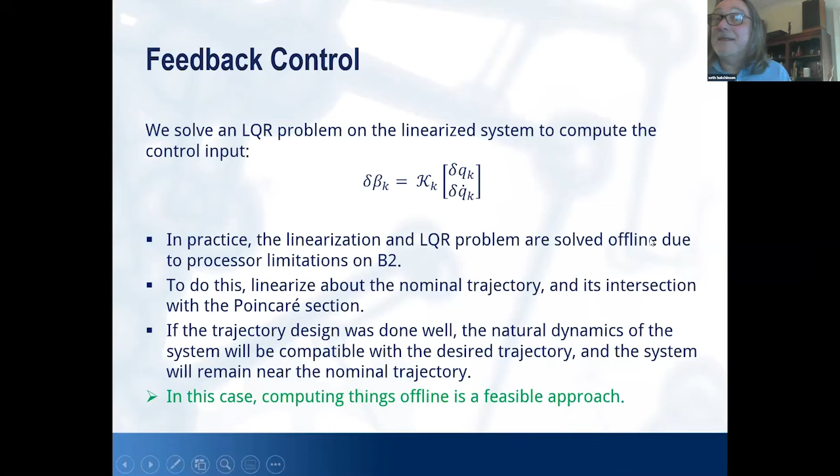And if you're linearizing about a desired trajectory when you design the controller, that design approach assumes that the robot, when it's actually behaving in the world, will be somewhere near the desired trajectory. If not, the linearization doesn't make any sense, right? So it's important that you start this robot with an initial trajectory that matches very well the trajectory that you used for the linearizations, right?

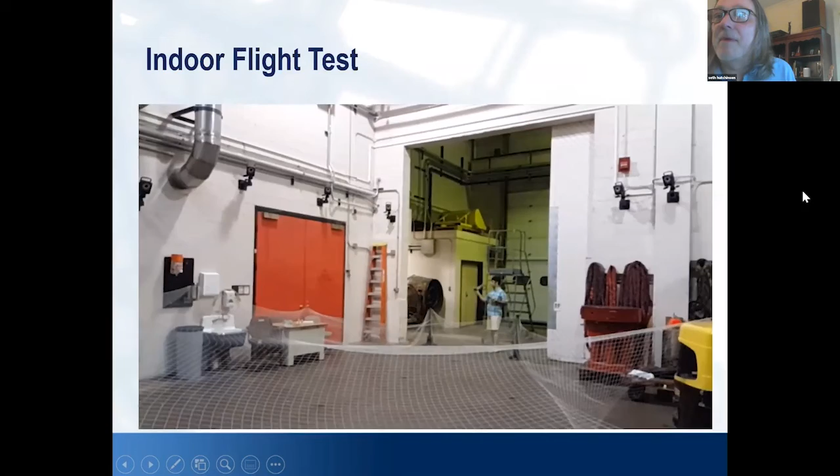And so there's some engineering work and also some work at the time of doing the experiment to ensure that you match the conditions that you designed for. Right? So I'll show you this one more time. And again, you see that we're far too optimistic in the placement of the nets, and the robot flew much faster and further than we expected, as usual, smashing into the wall. So that's what you get using a very simplified aerodynamic model.

I've got about 5 minutes left that I'm going to spend talking about how to do even better than that. You can do better if you have better models of the aerodynamics and of the control surfaces that you use to control the aerodynamic response. So instead of just modeling each wing as a big flat surface, I'm going to make the control surfaces slightly more interesting, give them a few more degrees of freedom.

That means I need to be able to somehow understand the relationship between those control surfaces and the aerodynamic forces that result. In order to do that, I'm gonna do data collection, right? And really use some machine learning kind of approaches, not the deep neural network kinds of approaches, but just the parameterized model and parameter estimation kinds of approaches.

Then for the optimization, instead of doing the numerical integration stuff and numerically calculating gradients that we use for the methods that I just showed you, we used here direct collocation, which means you make some pretty strong assumptions about how you can parameterize and represent the trajectories.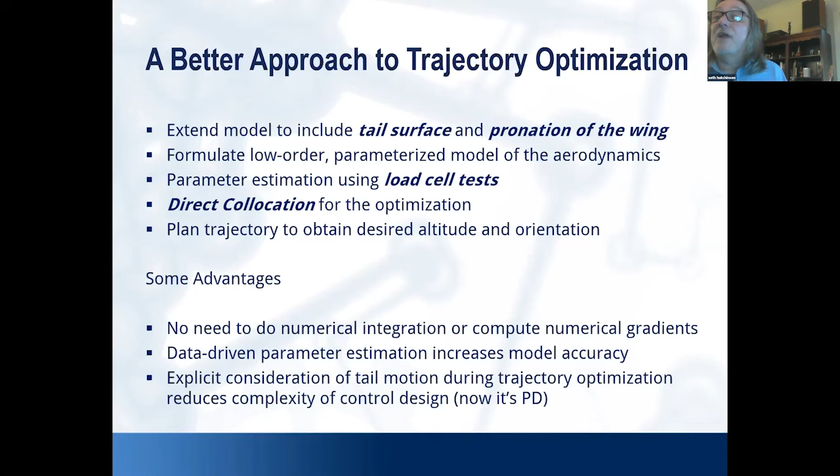And then we get out desired altitude and orientation, and we can do much better now and actually plan maneuvers that take us from initial conditions to cruising altitudes instead of relying on an engineer to match up the initial conditions perfectly. Right? So here's a slightly more complicated model of the robot, more degrees of freedom in the wing and in the tail.

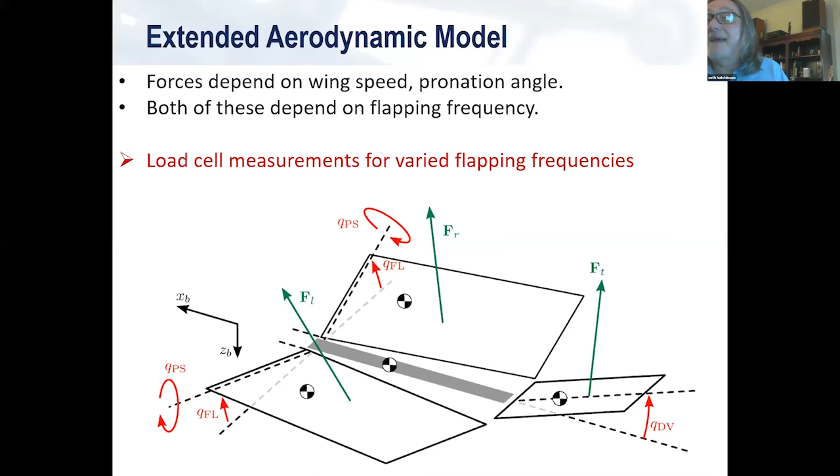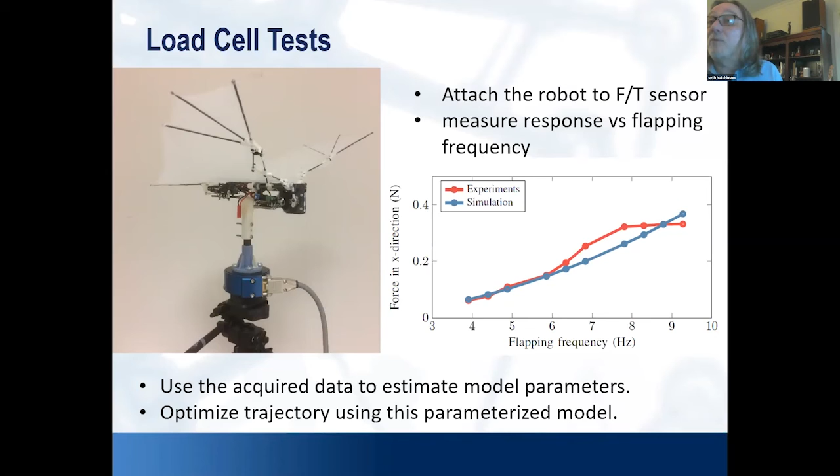And then we strap that robot onto a force torque sensor, basically a load cell, so that we can measure the forces and the torques that come out as a function of things like the flapping frequency. Here are some experimental results that we get. These results come from motion capture on the robot compared to the simulation. Simulation is shown in blue, motion capture is shown in red.

And something that's cool that almost never happens in real robotics is that our simulation, you can see the blue curve and the red curve are not the same. And for one of the few times in my life, the fact that the simulation wasn't that great turned out to be good for us. Why did it turn out to be good for us?

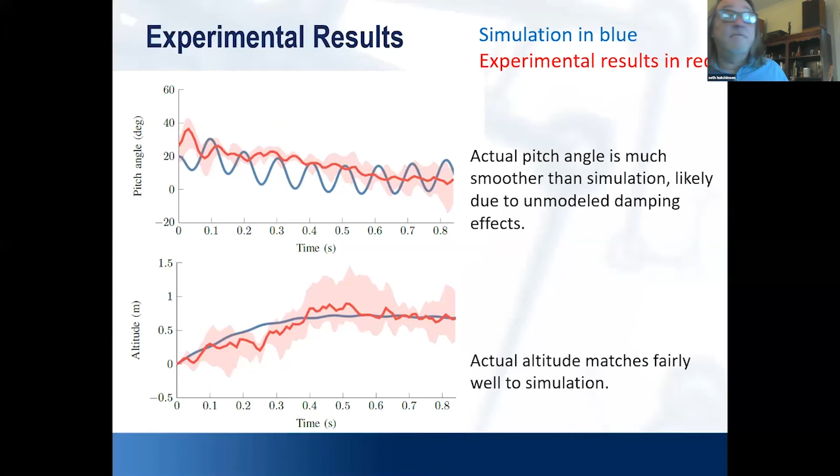Often you get high frequency dynamics that are excited when you do certain things that are really problematic. But in this particular case, it was the opposite. The high frequency dynamics got damped out by the physical system. I'll show you just a quick video. Here's the load cell that we used to do the experiments.

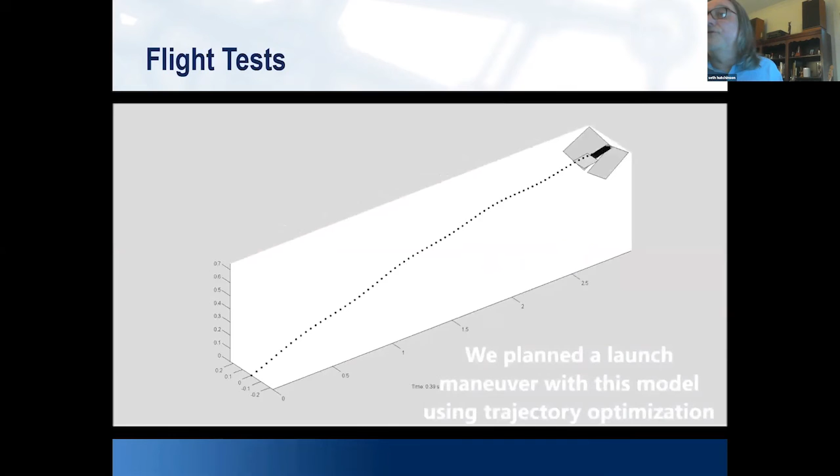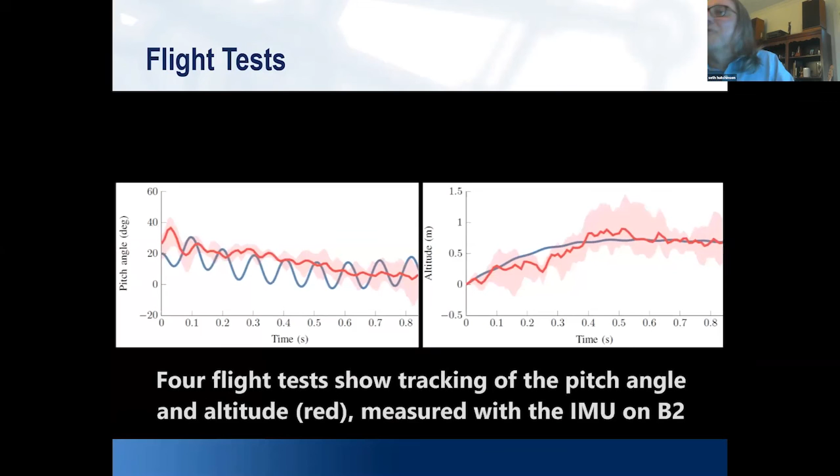And then when we did the trajectory optimization using the collocation method, we're able to plan these kinds of trajectories. And here's the robot actually doing this, following that planned trajectory to gain altitude. And now we've become more sophisticated in where we place the nets. We're placing nets vertically now to stop the robot as it flies.

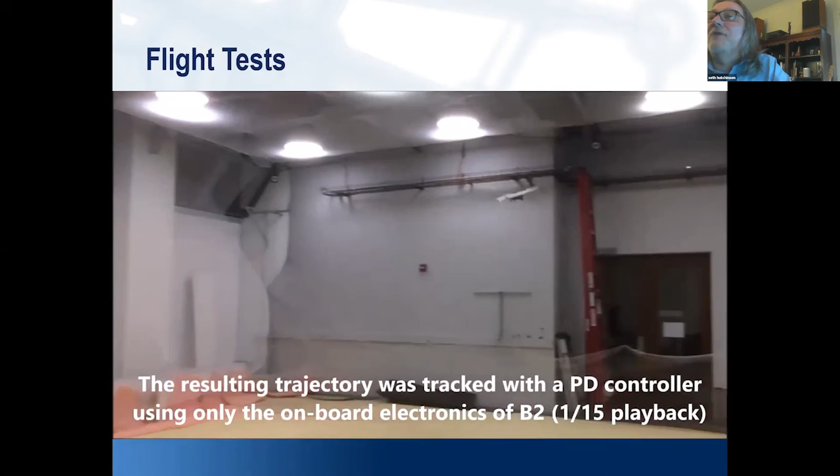Let me go back and show you one more time the launch. So you can see that the robot's gaining altitude as it flies until the moment that we turn off the wings and it coasts gently into the net. So we have a lot more control now and a lot more sophisticated trajectory planning algorithm as well.

Well, it's 1:48. This is a good time to stop. Just looking back, here are the concluding remarks.

When we're going from biology to engineering mechanical systems, what kind of data that you can get plays a big role in how the design process evolves. And for us, basically, we were able to look at and collect data for all the geometry stuff and none of the dynamics and the force-based stuff, right? So that's where engineering stepped in to take over from biologists.

And then we showed that once you have a physical design of the system, you actually can go back and collect data for the dynamics, right? We can't measure the dynamics of the biological system as it flies, but once we've designed and implemented the robotic hardware, we can go back and collect dynamic data for the mechanical hardware.

And so you can do sort of a two-stage learning approach where you do learning of the geometry from the biological system, then mechanical design, then learning the dynamical parameters of the system that you actually built in the next stage to make the optimization more realistic in the end.

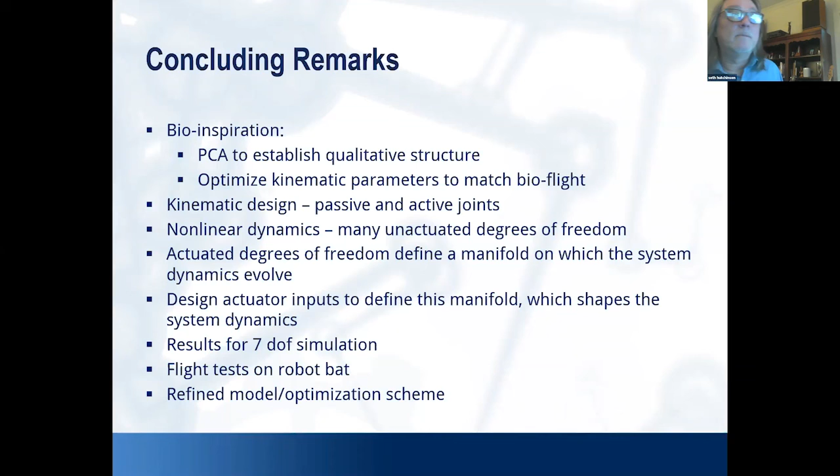Thanks. Diego? Hello, Seth. This is Diego Mercado from CIMAT, Zacatecas. I don't know if you remember me from Micay. Yeah. We're having some good food there. We have really good food there. You're making me sad now, Diego. Come on, you're welcome to Zacatecas whenever you want.

A very interesting talk. I really like the problem because it seems to be very challenging, right? My question is if you have tried to perform some hover flight. We saw some videos with the bat hovering, like almost staying in place. And I feel like if you can hover and then transition into some kind of a steady trajectory as you already can, you can do very interesting stuff, no?

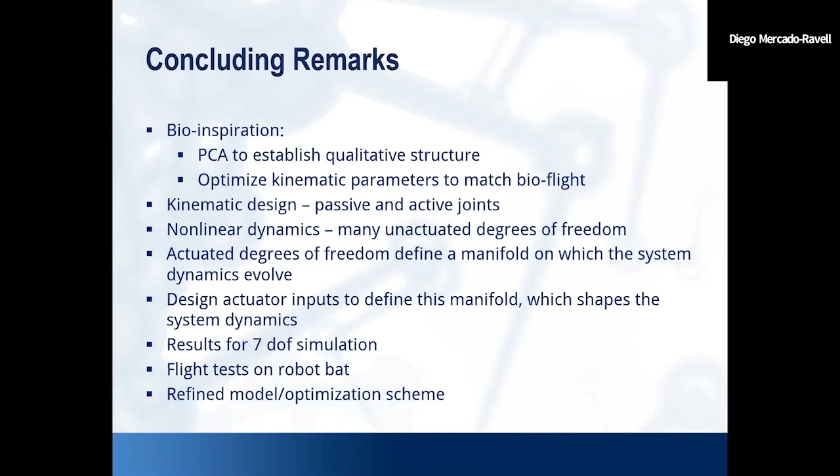It's true. So I'm going to show you this video now. So you see the bat. I mentioned if you put a lot of sensors on the bat, they don't want to fly. On the left is the bat with a sensor pack, and he doesn't want to fly. But if you put something on the ceiling that is delicious enough, he will fly. And so this is a case where the bat's going to fly up to the ceiling and try to eat the delicious food.

And the reason I'm showing you this is the hovering behavior is so much more complicated than the steady flight behavior, right? If you look at the way the wings are folding, but also the pronation angle of the wing, how the wings bend forward and backward as he's flying. Our mechanical system doesn't have that degree of freedom as an actuated degree of freedom. And so I believe our mechanical system does not have the capability to hover.

It has the ability to do some rapid maneuvers. So we did some rapid diving maneuvers. I don't know if I have any videos in this PowerPoint presentation that show some pretty agile responses. But in the end, I think it's not necessarily so impressive to show the diving maneuver and to brag about, look, we can make our robot fall out of the sky faster than your robot can fall out of the sky. I'm not sure that that's something you really aspire to do.

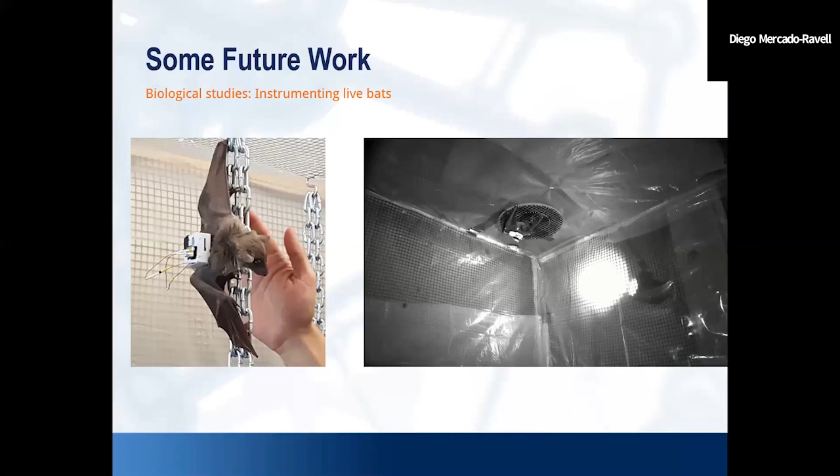Okay. Yeah, thank you. Sure. Some other questions or comments? I have one while other people think about it.

Well, you kind of already answered it. I was wondering about why the bat. It seems like a popular choice for this kind of work, but it also seems kind of like a difficult animal. I'm sure there are easier options, or what other ones did you consider, or why was it so obvious to go for the bat? Sure. In fact, this question, this is a question that when I answer it, I think is when I stop talking about engineering and start giving you advice for your career.

And so the reason we chose the bat, there are 2 or 3 reasons. The first reason is this. If you want to do biologically inspired robots, you should not do snakes because Howie Choset already does snakes really well. Right? You shouldn't do the cheetah because Sang-Bae Kim already does the cheetah really well. You shouldn't do a fly because Rob Wood already does the fly really well. And you start crossing off the list all the animals that somebody already does really well, and bats are still on the list at the end.

So that's one reason. The second reason, Soon-Jo met Kenny and Sharon at a conference and saw what they were doing. And so the second reason is we had access to some collaborators who were just spectacularly good on the biology side, and even on the engineering analysis of the biological structure of the bat. And so we collaborated with them on the proposal that got funded, that paid for this work. So we didn't have enough money to just go out and design bat robots, right?